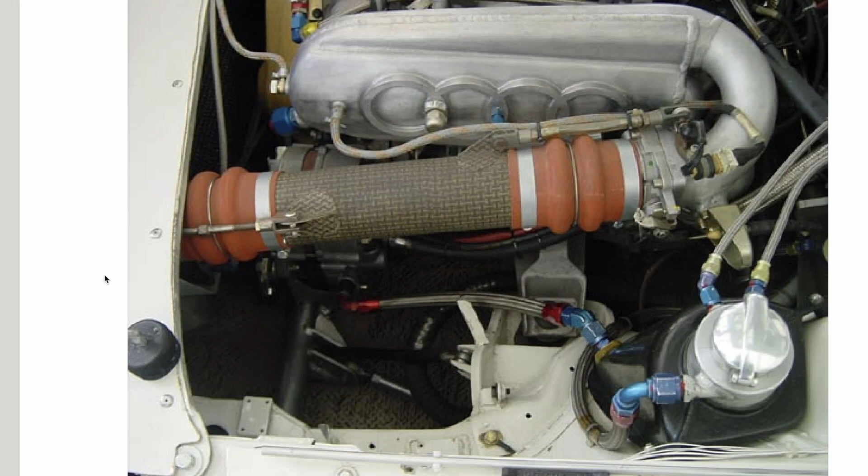What we have here to start with is based on a rallycross engine. This is a series where they use a lot of boost and response is king there rather than peak power because turbos are running under restrictors.

So what we see here is actually an intake tube going into what's called a diffuser, and this gradually reduces the cross-sectional area as it goes along the length of this plenum, which is this volume below it. Now, this is done to go and try and balance out the flow over all the cylinders whilst giving up a little bit of flow, because it adds a bit of a flow restriction to it. So when you add a restriction, it balances out the flow, but conversely, it limits the flow. So in these high boost applications, that works well.

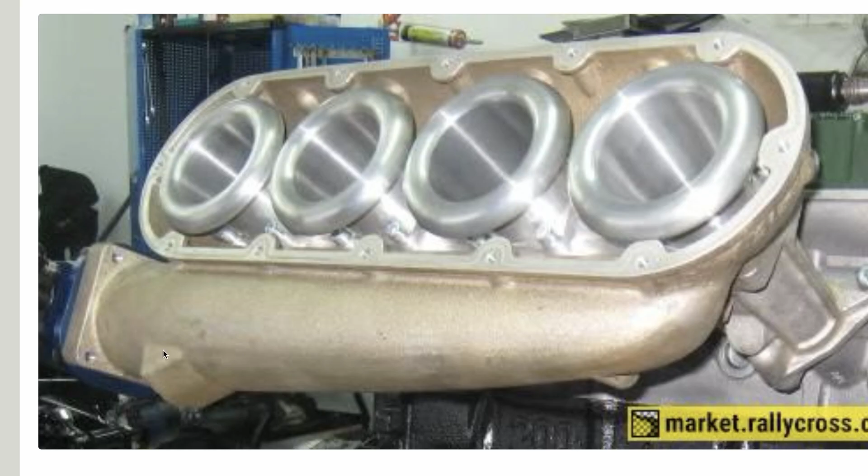However, we felt for what we were doing, needed maybe a little more flow than just this pure restriction. You can see here on the inside of the plenum, again, you can kind of see the intake here and this diffusing over the width of this intake plenum here. The trumpets are inside and it would come out, the air would come out in this slot below it.

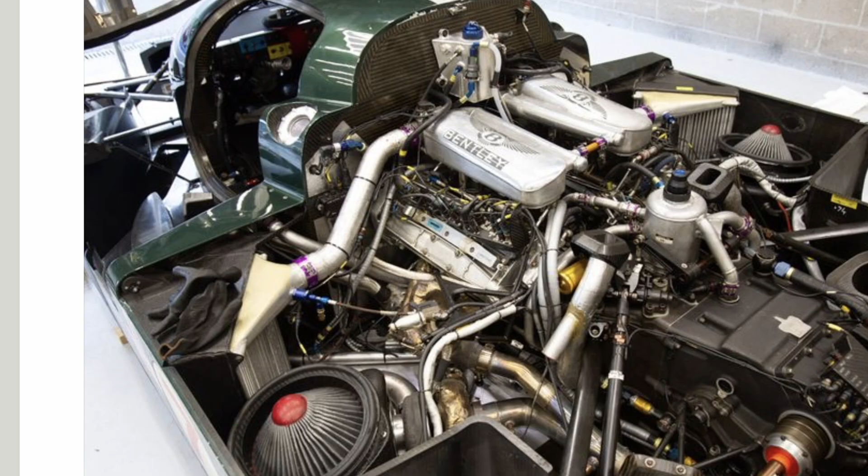Next up, and this was when we were considering the twin turbo layout, was this the Bentley Speed 8, I believe, the Le Mans car, LMP1 car from a couple decades ago. This was a twin turbo layout, and what we looked at was two separate intake plenums. There's a slight mismatch left to right there, but ultimately it's two intake plenums and it combined this diffuser going into this small plenum volume. So that was maybe our initial thoughts of how we should go about doing this.

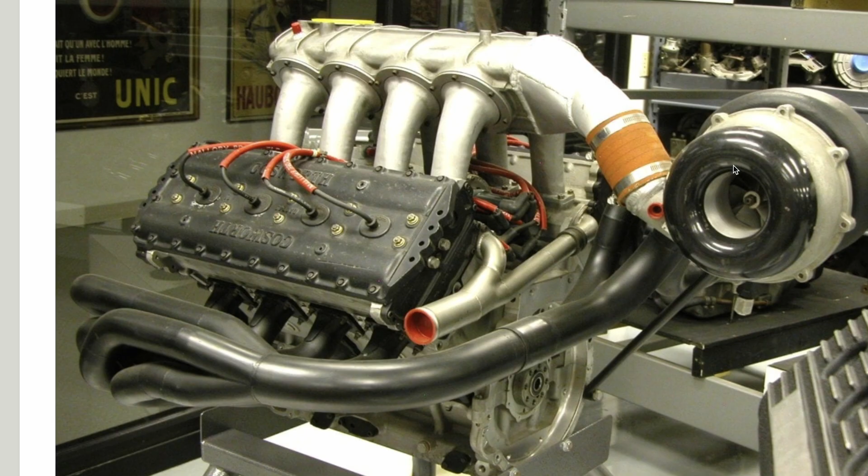The other things we looked at were IndyCar engines. This single turbo behind the engine layout is what they've been using for several decades now. However, they're not using an intercooler, so they get a really short intake run from the turbo compressor outlet to the intake of the plenum. But because they're not intercooling, they're relying on both low boost and methanol to cool the charge, where that simply isn't an option for us, unfortunately.

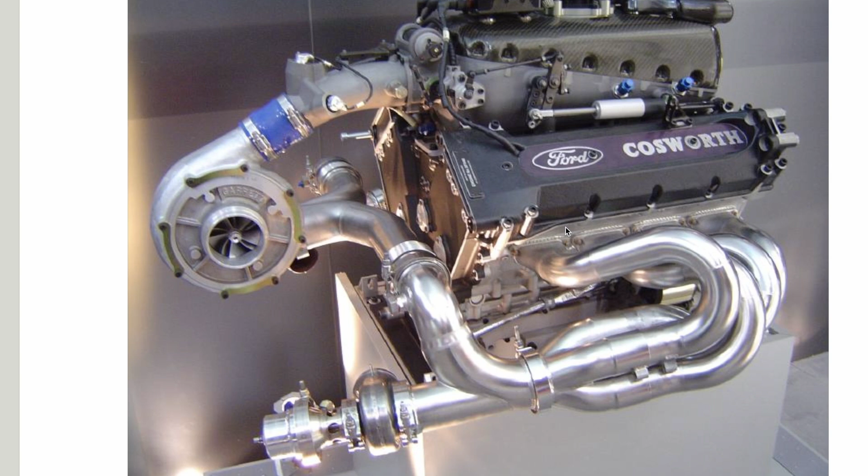So this is a very early engine here, maybe late 80s, early 90s. This is a later one, which I believe is a Cosworth, either the XD or XE. You can see here they've got more modern materials with a carbon fiber top end to the plenum, and it's a cast lower side to it.

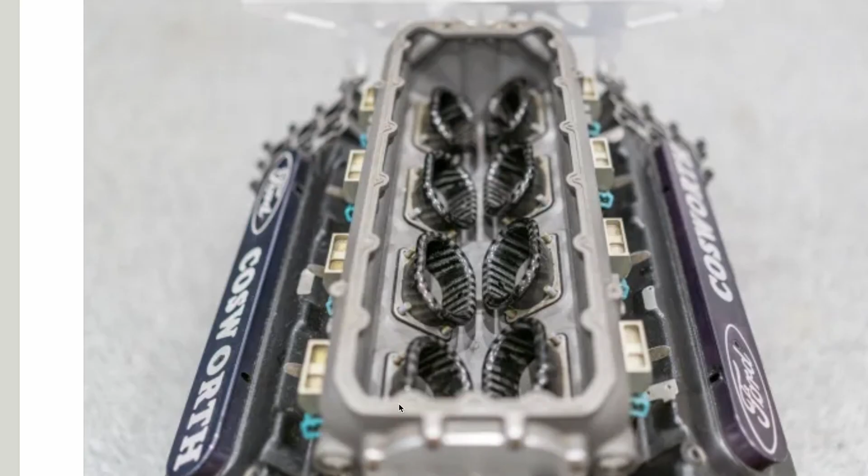There's actually a lot of force trying to blow the top of the plenum off the engine. We worked out, I think for our plenum, it was about 300 kilos, so significant. You can see here the inside of this, actually looks like a model by the looks of things. The inside of what the plenum looks like though, very similar to this with carbon intake trumpets, and these are aimed towards each other as well.

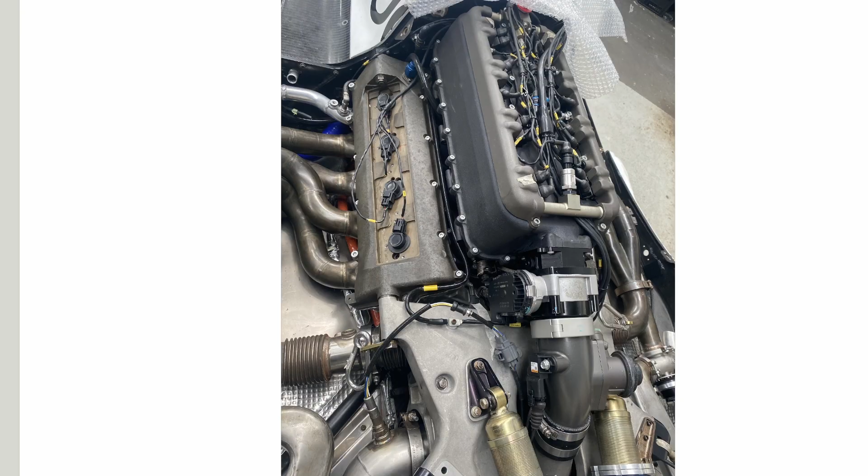I believe that has a scavenging effect as well as a nice tight package, which these IndyCar engines had to consider because of their very low cross-sectional area and very streamlined cars.

Here's another example, another IndyCar by the looks of things, again with a big volume plenum on top of the engine, and the intake from the rear of the plenum because of the turbocharger. This isn't available to us, but you can see a few modern pieces added to this setup — looks like a bit of a resto-mod rather than original equipment, like a regular Bosch throttle body there.

So that was some benchmarks for us. Pretty interesting. What we knew from it was we wanted a reasonable plenum volume for good power and performance, and to ensure the flow was balanced over all the cylinders. We also considered the tight package we saw in IndyCar and how we'd route our cooling or air tubes going to the plenum itself. So, really helpful in that regard.

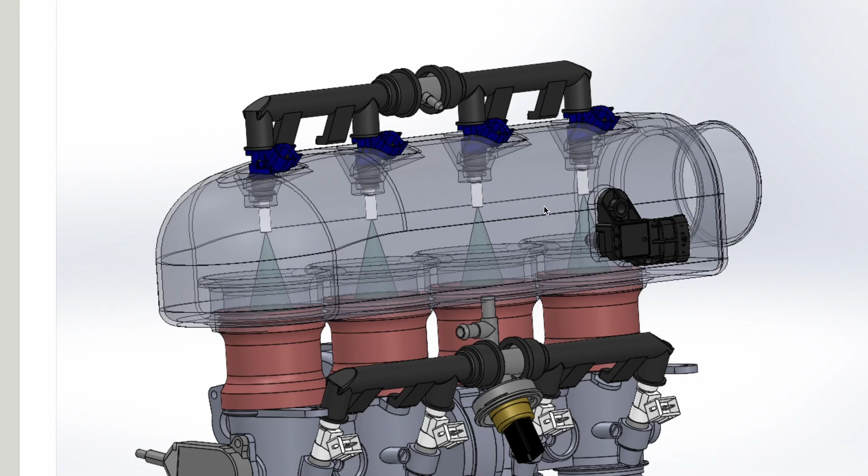What we were worried about here was the air coming in going across the spray cones, potentially blowing them into the cylinder next door. So that was another feature we were considering with the air coming into the plenum.

The separated plenum is nice because it can remove effects from how the two sides interface with each other with the twins. However, conversely, you're essentially running the engine like two separate banks, which comes with some added challenges. So I don't think it was as important as maybe we first thought.

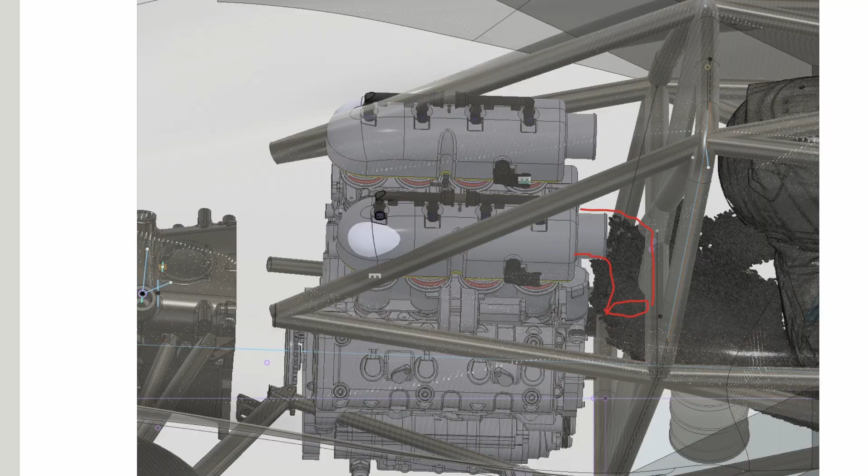You can see here, even though this was sitting quite low, it was sitting quite wide, coming out towards the edges of the bodywork and also hitting these cage frame rails. So, a couple of headaches packaging-wise there.

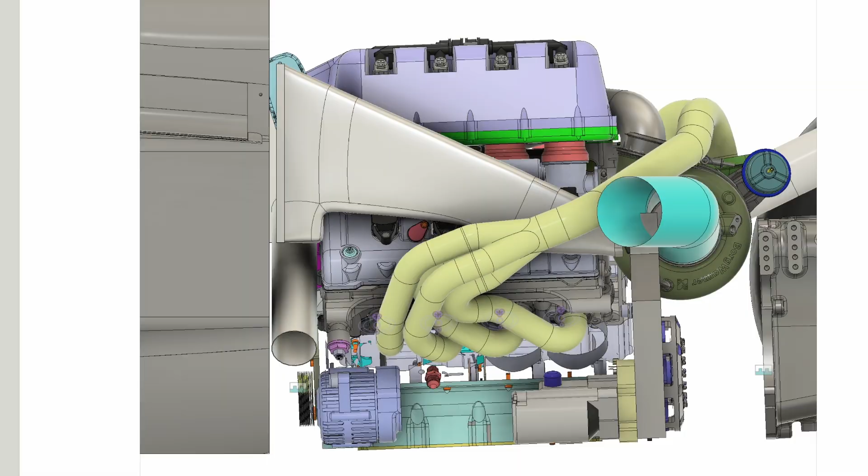We saw that we needed to narrow it up a little bit. Here you can see when I went over to the Tatus tub — this is now the Tatus package — we went to a bigger, boxier, larger air volume style layout, which you can see on top here. But the physical space this was taking up proved to be quite a large challenge, causing some issues. But this is with the single turbo layout, how that's all sitting.

A view from the other side — this was where the twin turbos were going to sit, all the way up there on the right, versus the big single in the back. I think this was a much neater package in that regard.

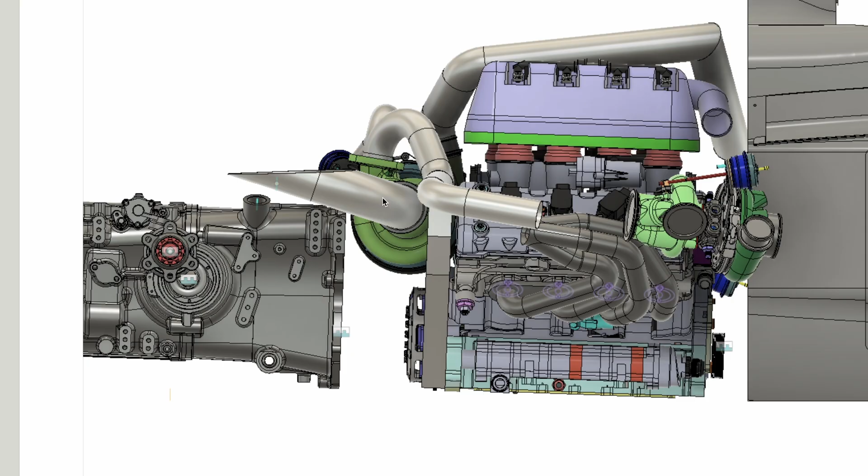So this is what we were looking at development-wise. It still wasn't quite hitting the mark, I don't think, packaging-wise.

We also considered the length of the inlet trumpets and where we wanted the torque curve to be. The philosophy around this engine has always been a high-revving power monster, but we've got to turn that into more of a torquey engine, so we wanted slightly longer intake runners. That also helped with vehicle packaging if we kept them longer and curved them in at the same point, similar to that older IndyCar style layout.

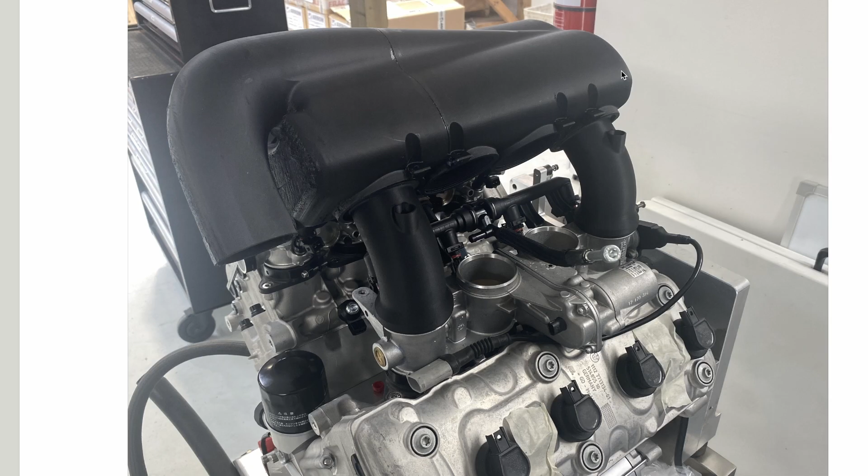With that, we came up with a concept and printed it out in plastic for this period of time, which has these intake runners coming into this central volume of air essentially.

So all these intake runners which house the secondary fuel rails on top were separate parts compared to this main volume. And then we took an intake in from the front of the engine essentially, and ran this on the NA engine with the plastic plenum just to see its torque characteristics.

What we found was it did give up a good bit of peak power, but it did help torque in the mid-range, which is what we're looking for. We can always push the turbos harder at the high end for peak power, but getting response in the mid-range is key, because on the mountain you're really struggling for exhaust energy.

So anything you can give to the mid-range will really help the performance of the car, both coming off the turn and spooling the turbo. At this point we were looking at all the different materials we could use. We were considering casting, CNC machining, 3D printing, maybe even out of plastic. There are a few high-temp nylon carbon fiber reinforcings that could have maybe done it.

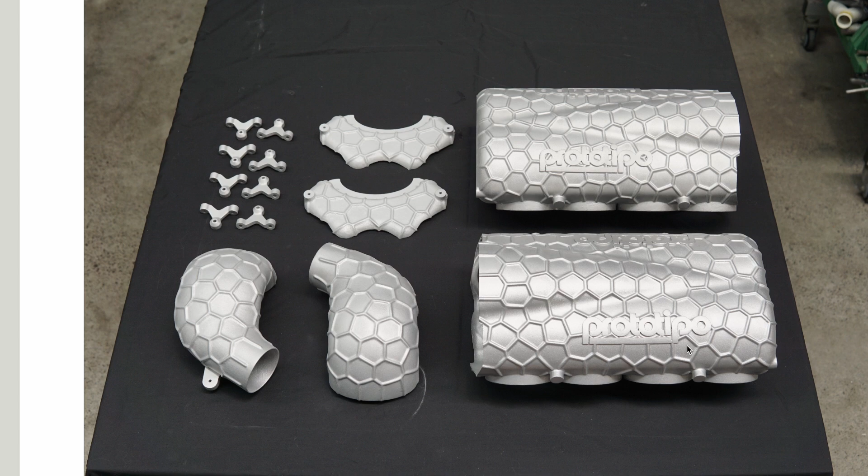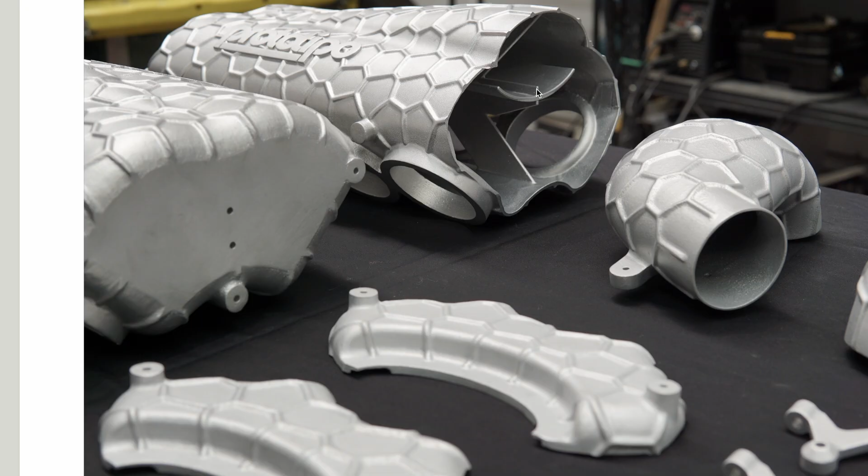But we came upon 3D printing aluminium. So we got the main body here, the end cap, and the feed tubes as well. You can see some of the internal geometry in here, and it's essentially a bit of a diffuser that runs through this main intake channel into each individual cylinder.

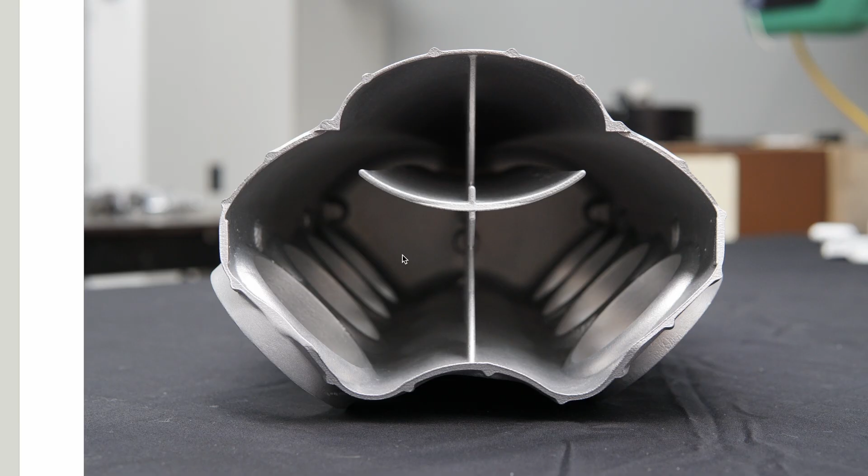So a little bit of a restriction there, but still reasonably open, and there's a good air volume underneath it to essentially make the plenum work as an air volume. You can't see it here, but there's a central rib that supports the whole piece structurally, but it also allows air pulses to go from side to side as well, so all the cylinders can interact with each other in terms of airflow.

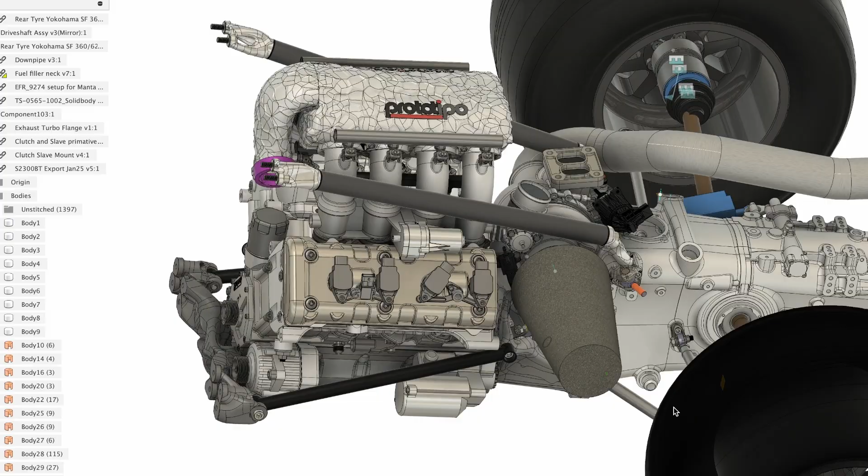We have a little diffuser in here that's doing its best to spread the air evenly over all the cylinders. So this is what we came up with, and then we go and look at it in CAD with the whole rear end package of the car. You see it looks pretty neat.

We've got all these hexagonal structures on the top of it, which helps essentially with the stiffness of the part. So we can maintain a very thin wall thickness, but add a bit of structural rigidity all over the whole piece, and that combined with the internal ribs goes to support the whole thing.

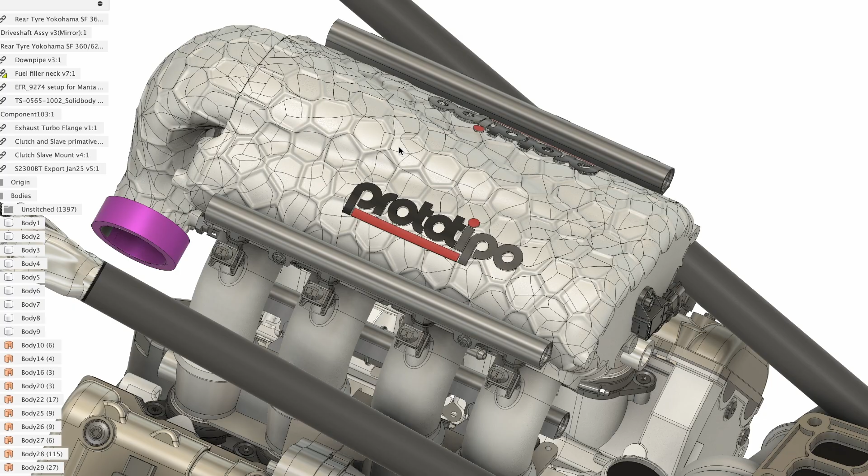As I said before, we calculated about 300-400 kilos of force trying to blow this plenum off the engine, which is significant. So that's one of the big forces we had to consider reacting against.

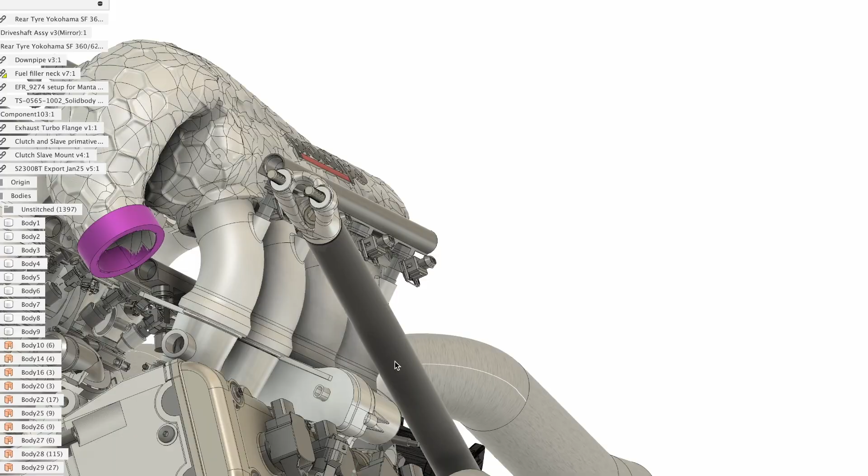And we have these mounts here that go and hold the plenum down. We've got the air temperature and air pressure sensor on the back there as well, and then we're using a Wiggins clamp on the front here to connect to the boost tubes themselves. So a pretty neat looking piece, I think.

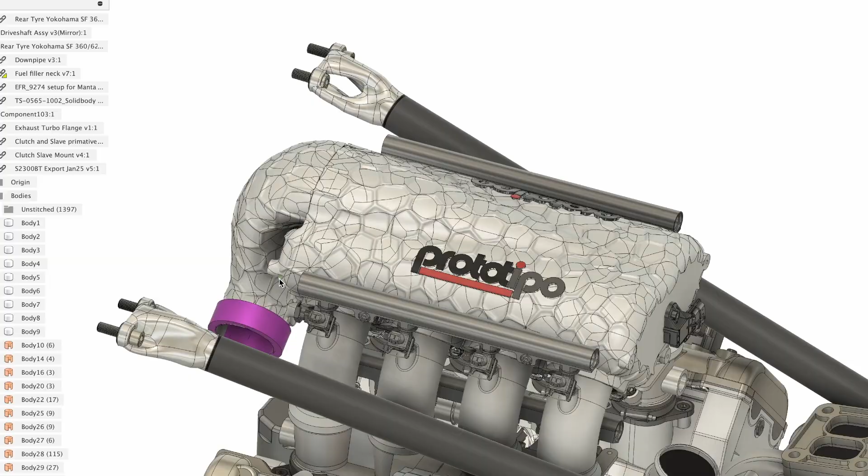Taking advantage of the 3D printing technology, the most common question I get is how that must be really expensive, and actually it ends up being cheaper than all the other methods when we're looking at one, two parts. So it's an incredibly powerful manufacturing method to do some really crazy things, especially with this very bespoke, high-end, high-performance style car.

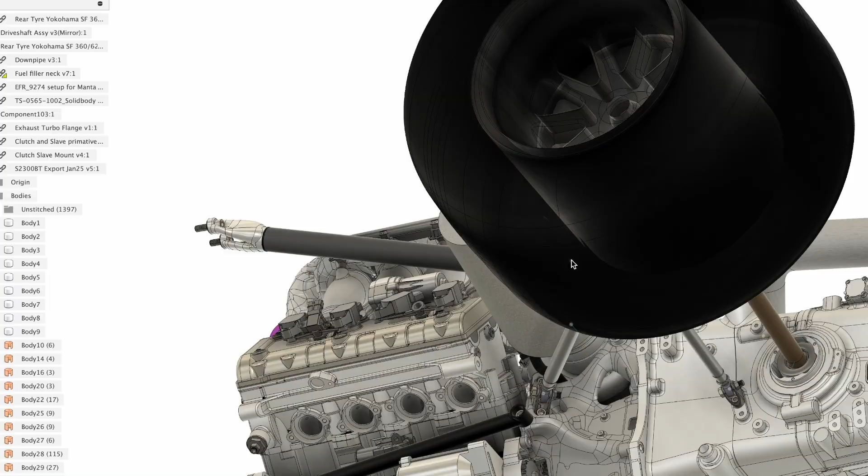So I'll go into a little more about 3D printing and generative design in another video, but for now I think you can see it makes a pretty neat piece on the car.

There you have it, an in-depth look into how we came up with this crazy looking intake plenum. Really excited for it to run on the dyno with the turbocharger. That is getting installed at the moment, so that should be running within the next couple of weeks, and we'll get some really good performance numbers from that. Looking forward to sharing that with you coming up here.